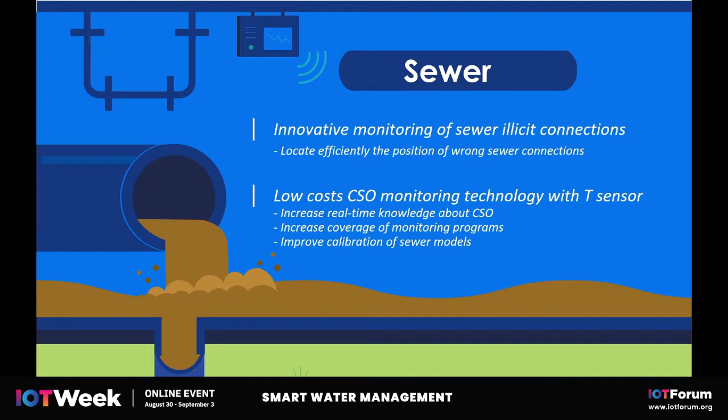Instead of monitoring only one or two main locations, we are able to cover a big part of the catchment or the city. And we can use this information also to improve the model that we have today on our sewer network and be able to represent better what's happening in the underground.

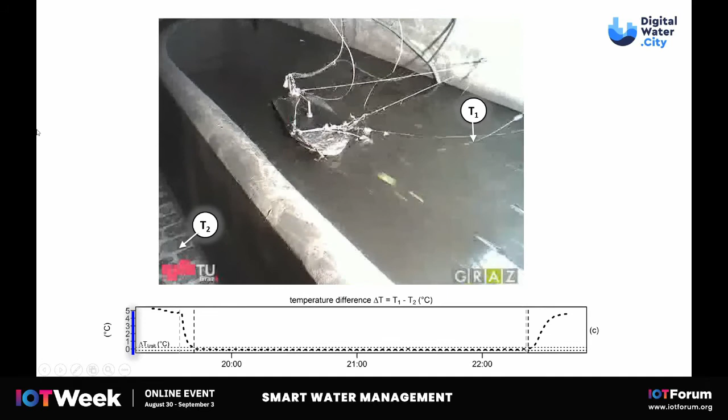So here I want to show you a small example. What you see on the top is an example of a sewer network in this short video. I hope it works also with the broadcast.

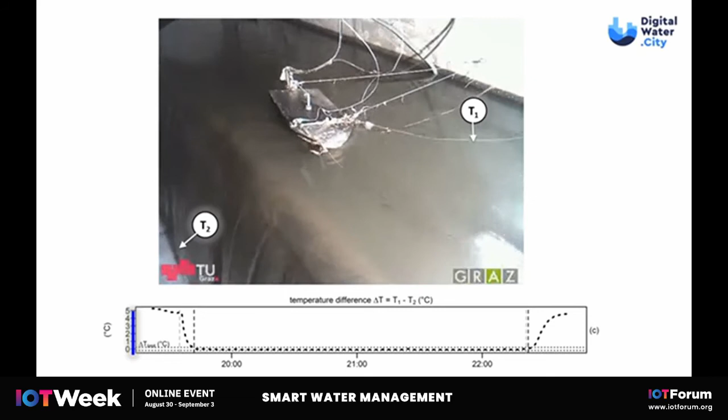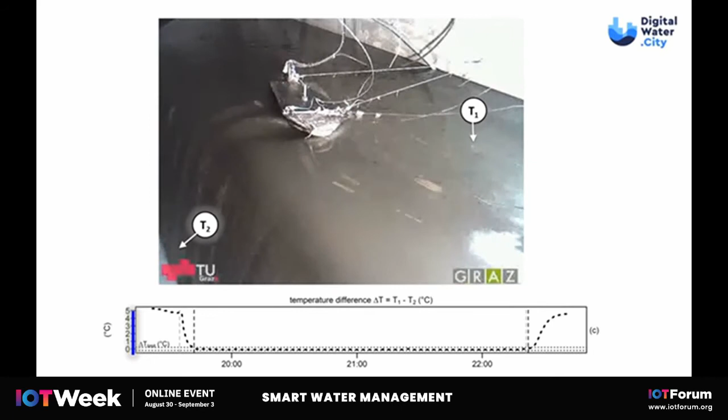On the right, you see the main sewer channel. And on the left, you see that during the rain events, the level of sewer is increasing and is overflowing in an overflow channel that is going directly to the environment. It's done to avoid that the water lands on the street and causes flooding.

And what you see on the bottom is a diagram that shows the temperature difference between two temperature sensors. One is in the sewer network. The other one is on the overflow channel. So before the event, there is a temperature difference because one is measuring water and the other is measuring the air temperature. And during the overflow event, they measure the same. So that's why the temperature difference is 0, because there is water in the overflow channel.

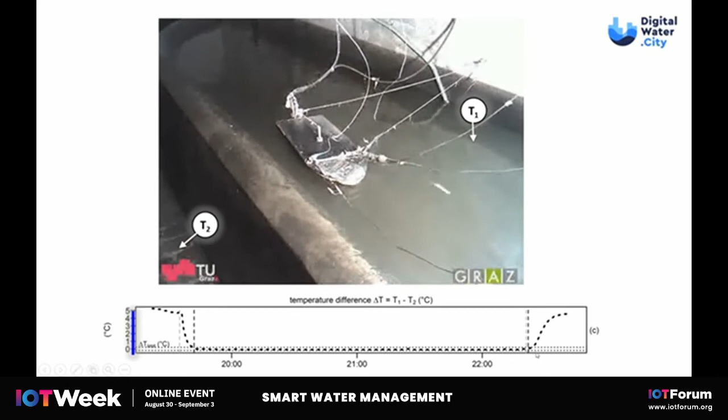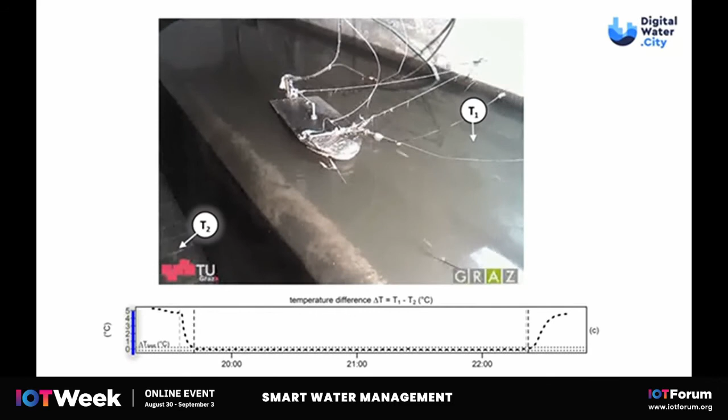So by using these simple techniques with cheap temperature sensors that are connected between each other, we can assess quite precisely the beginning of the overflow events in the sewer network and also the duration of these events. And we can do that not only on one location, but on all the locations where we implement this kind of sensors.

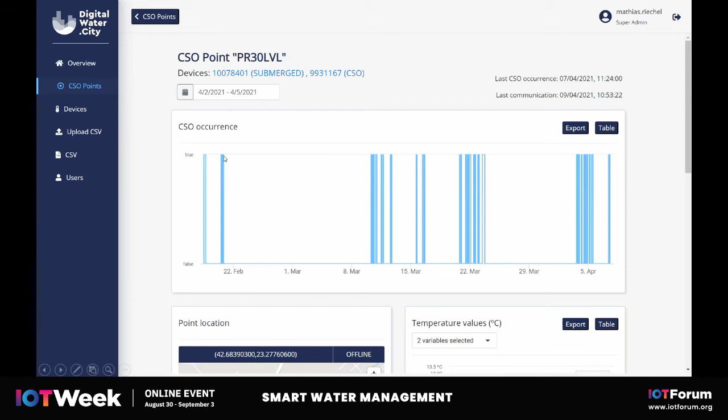And you can see for one overflow, this is another example in Sofia in Bulgaria, where we are also testing this technology. And here on the right, you see the temperature deviations between two temperature sensors. And it appears clearly that here in this period, we have an overflow, we have the same temperature. And after the event, we have this temperature difference.

So this is quite promising. The potential is that it is cheaper compared to the current monitoring technology to monitor the flow and the volume or the level in the combined sewer overflow. And there are tests that are ongoing in both Berlin and Sofia to assess the precision of the technique compared to standard monitoring technology.

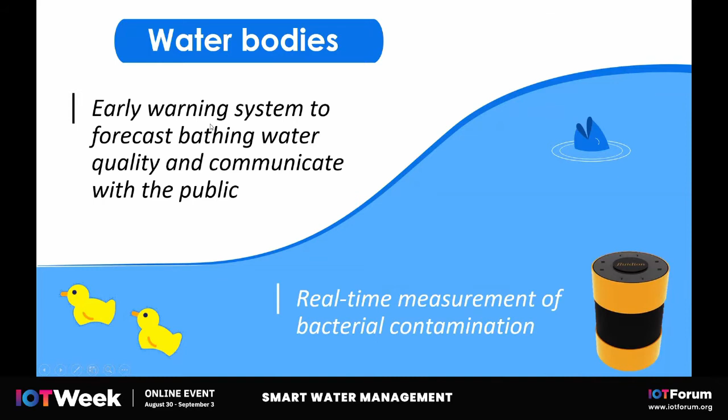So the second topic that I wanted to address is the topic of water bodies. So we talked about sewer emissions. Now we are looking at the impacts. And for that, we are testing two technologies, mainly in Paris. The first one is a new technology for real-time measurement of bacterial contamination. And the second one is an early warning system to predict bathing water quality and use this information to communicate with the public.

So the first technology is called the ALERT system. It's developed by the French-American company called Fluidion. It's a technology that allows online real-time measurement of bacterial concentration in the river. It means that instead of taking traditional samples and then bringing these samples to the lab, we are able to get directly the information about water quality on site without going to the lab.

We tested this technology in Paris, Berlin, and Milan, and we found that we have so far a comparable precision with the laboratory, which is quite interesting because that would mean that we could in the future use this technology instead of regular or irregular measurements coming from the lab, because it's difficult to do them every day.

And with the technique here, we can have access to results within less than 12 hours. There is a small reaction which is still happening in the device because the measurements are based on fluorescence.

So we will have the final results next month, actually, from this technology. But all that has been tested now leads to the conclusion that it's quite promising in terms of maintenance needs, which is quite easy, and accuracy and precision compared to lab measurements.

And we are also using this data for another purpose. With this information, we measure water quality in a given location. So we are testing that in the river in Paris, in the Seine, and in the Marne. But we also want to use this information to develop models. And this model, we call it early warning system. These are machine learning based models that predict bathing water quality.

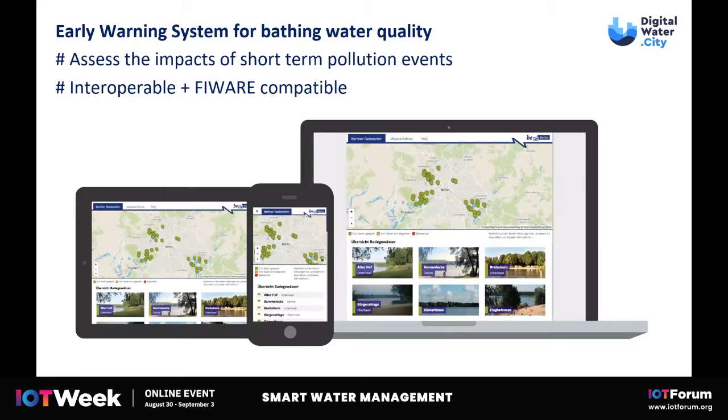And we hope in the future that we'll be able to propose these solutions to other municipalities, knowing also that this solution is and will remain open source. So it will be easy to use the code and simply adapt the tool to local data to be able to train it and simulate bathing water quality locally.

So mainly the rainfall, the flow, the wastewater treatment plant, the river flow, and we can select the different variables to create a model and test different models to find the best one to simulate bathing water quality. And in Paris, this information will be used also to communicate with the public and inform them about the risk of contamination.

So in conclusion, I just wanted to give you a grasp in this presentation of a few new capacities that we have using monitoring or modeling to better understand the emissions and the impact from the sewer network on the environment. And I invite you to visit our website, Digital Water City, to find out more about the other solutions we are testing and developing in the frame of this project.

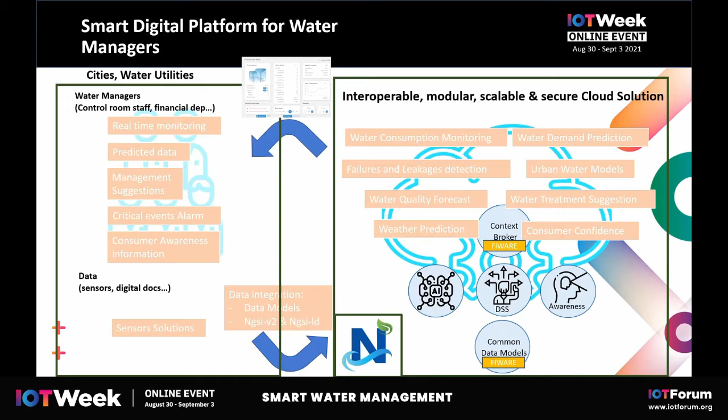For this purpose, we chose to use FIWARE as the framework that helps us to provide this interoperability, mainly because it was very supported by the European projects, and in Digital Water 2020, the projects there are using this. So this shows the potential of this framework. And also, we decided to make it modular and scalable, since it is required for any new modules that want to be added to this platform to be easily added.

So basically, currently we have a different set of smart modules. Most of them are data-driven modules. The core of the platform is based on FIWARE to provide this interoperability with the FIWARE data models, the FIWARE APIs and NGSI-LD, and the set of services that we provide are failure detection, consumption analysis, water demand forecast, and water quality forecast.

These modules can be easily upgraded, and the idea is that any water manager, any water utility that wants to have access to any service, can do it using the NAIADES platform, where they can select the set of services that they require. Of course, they need to provide the required data for the services to work. And as a result, they will obtain the results of these smart services. That's the main idea.

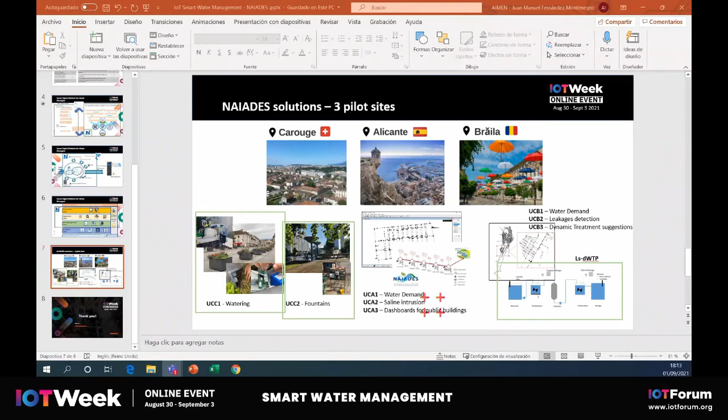Hello, I'm Tassos Karakostas from CERTH, and we are coordinating the project Aqua 3S, which is actually a bit different than the other projects, since it has been part of the DRS, the security calls of Horizon 2020. That means that the project is, from one perspective, a drinking water related project, but from another perspective a security project.

So the challenge here is that potential disasters are extremely crucial when we have to do with drinking water. So drinking water has been considered as a main source of risk, both for typical disasters like floods, but also for man-made disasters, attacks, and so on.

So in Aqua 3S, we try to combine novel technologies in water safety and security, and the goal is to standardize the existing infrastructure, complemented by state-of-the-art detection mechanisms. In other words, we try to provide a framework to present how new innovative solutions can be integrated into existing infrastructures.

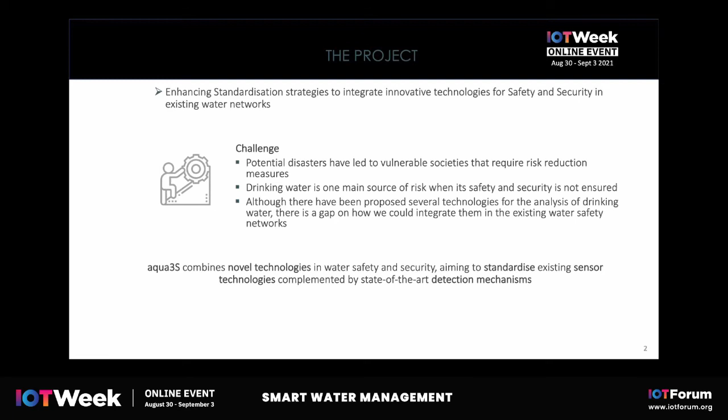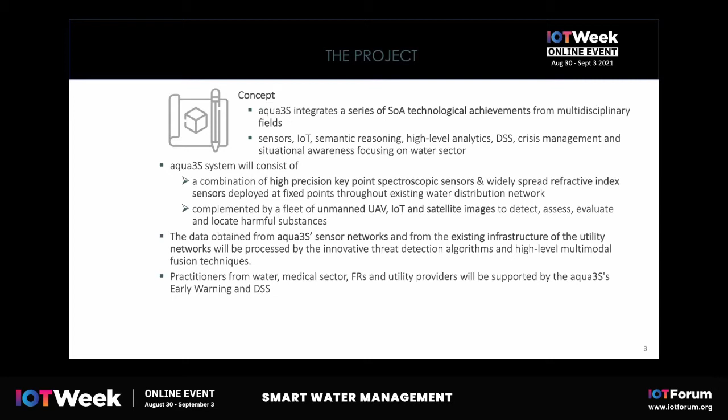So we have a series of state-of-the-art solutions like new sensors, like IoT devices, and additionally some of the solutions that you have already heard in the previous projects, like reasoning, decision support systems, and so on. So from one point of view, we try to see how the new sensors that we have developed or the new solutions that we are working on, like social media analysis, can be effectively integrated into existing infrastructure and how these solutions can actually address disasters related to drinking water.

Here you can see the overall concept of the project. We have the sensors over here, we have the UAVs and the analysis of the pollution in lakes or in other water resources.

We have also analysis of images regarding floods or droughts, and some input, crucial input from the social media. And all of these we are providing through specific user interfaces to the authorities and to the other stakeholders, the necessary information to enhance their preparedness.

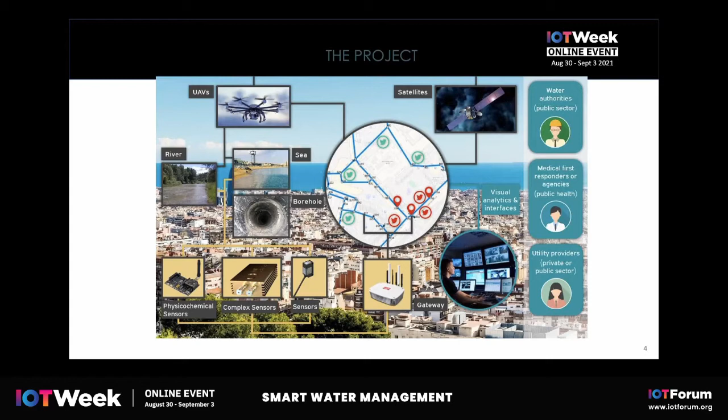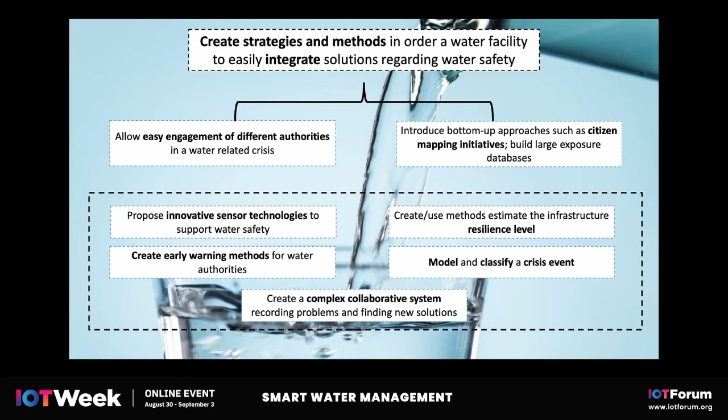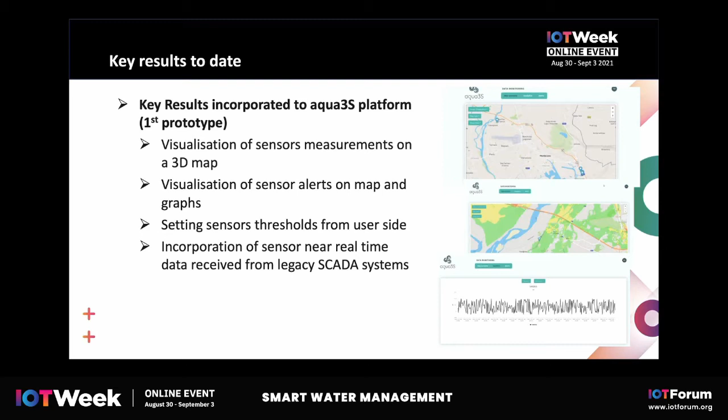At the moment, we have done the first prototype. We have created the visualizations of the sensors on the 3D map and the specific graphs. We have also integrated sensor measurements in our systems. Here, almost all these new developments are ready and will be tested in February in three pilots. And if you would like, please contact me to give you more information on these.

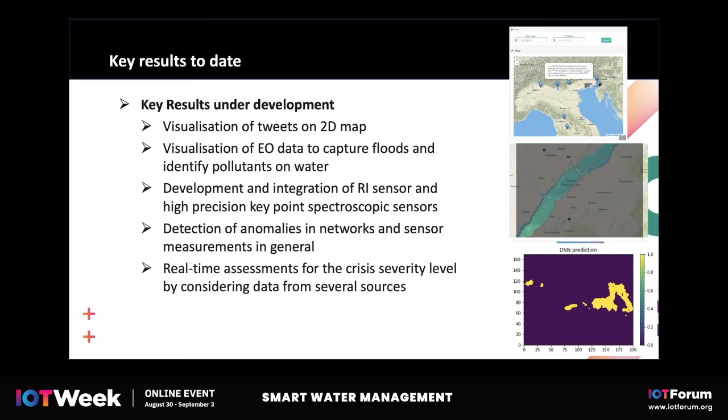So specific visualizations based on the social media and Earth observation data, integration of the new sensors, detection of anomalies in networks and sensor measurements in general, and of course the real-time assessments and the crisis severity level. Our project is completely relevant to the policy, to the Water Framework Directive and to the Flood Directive, with all the solutions that I have explained previously, and this is one of our main goals because we have to do with the standardization and of course all the policy aspects.

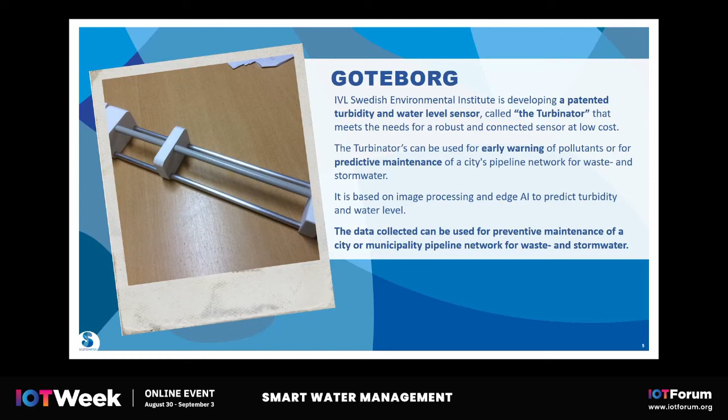Specifically, we are testing a lot of sensors, but we are also testing a new patented sensor developed by IVL, which will measure turbidity and water level. We looked at the technology to make it cost efficient, both in investment and in maintenance. This can be used for early warning of pollution, or for predictive maintenance of city pipelines and networks for waste and stormwater. It is based on image processing and edge AI to predict turbidity and water level. And the data collected can be used for preventive maintenance of city or municipality pipeline networks for waste and stormwater. And I will briefly show you how the technology works.

By processing the information at both sensor and system level with AI, an estimate of the load or deviation in the network over time creates the insights needed for predictive maintenance of the system. So how it works is that you have a light beam or laser beam here, and you have a camera, and you get this picture in the water. And when you analyze this picture with AI, with the length you can see the depth, and from the dispersion pattern of the light you can estimate turbidity. Turbidity is a measure of how many particles you have in the water. So that's a good approximation of pollution in the water for an early warning system before you do deeper analysis. So that's how it works.

And as for the innovative elements, we have done quite extensive market research to see what's on the market. At the moment, there are, of course, a lot of turbidity sensors on the market, but none with low maintenance cost like this, because we mount it in a pipe close to the ground and place it above the water. And that, I think, is the essential thing. This is the only sensor for measuring turbidity that can be used without putting any parts in the water. And that's very beneficial, since when you work with water, you almost always get growth of algae and other things on sensors you put in the water, which means it needs much lower maintenance if you can do the measurements without putting any parts in the water.

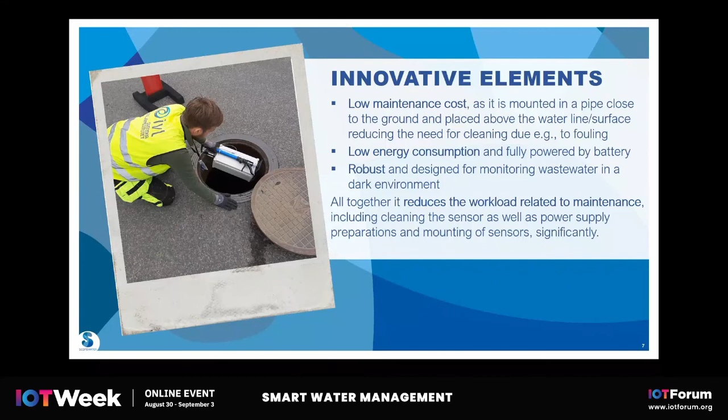And the main benefits with a connected low-cost, low-maintenance turbidity sensor is early warning of pollutants in waste and stormwater systems. Today, there are very little measurements of stormwater, and we are testing this particularly on construction sites, which have regulations on how much they can emit, and they need some cost-efficient way of monitoring this.

But we can also have another application, which is increased capacity in the waste and stormwater system, which leads to less environmental impact and fewer floods. We can also have fewer manual inspections, which saves time and travel and creates fewer traffic disruptions.

We also have longer service lives on the pipe network, as measures such as the flushing system are taken only when needed. And we also can work with leakage detection in the pipe network by monitoring the trends of turbidity in nearby sensors to distinguish local changes in sections of pipes.

And these are all questions that we know, since we have involved both the utility of Gothenburg, but we also work with the utility of Stockholm, and we have contact with other utilities, and we see these are real problems that the utilities want to have solved, but it has to be solved in a cost-efficient way that doesn't create maintenance and so on. So that's what we're aiming for.